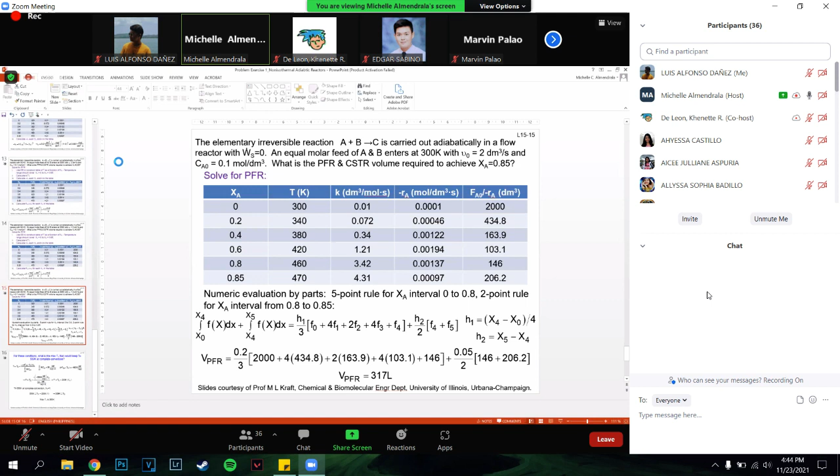Okay, let's start with this energy balance. I prefer the lecture of Dr. Kraft from Illinois because it has the detailed... anyway, so I'll just start with this. We will now be discussing thermochemistry for the non-isothermal reactor design. Everybody ready?

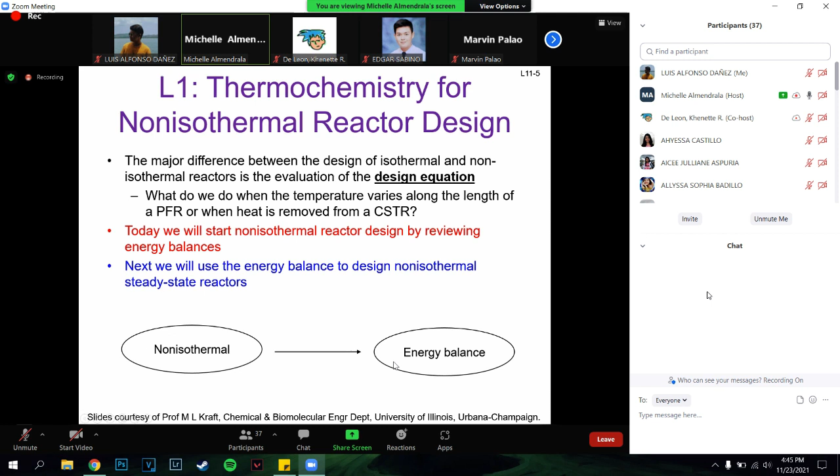The major difference between non-isothermal and isothermal is that there's another equation you'll need, taken from the energy balance, to correlate the conversion as a function of temperature. So why? Okay, we already answered that question.

For liquid phase reaction, take this example - this is a liquid phase reaction, exothermic, so heat is given off during the reaction. So there's a process wherein heat is being released. In your study of thermochemical equilibria, you have seen that when heat is released during exothermic reaction, if this heat is not removed, what happens to conversion? Conversion is low when Q is 0, for adiabatic process.

So for today, I will just discuss adiabatic operation first. The thing about adiabatic is that the conversion is low, when you compare this with non-adiabatic process, wherein heat will be removed from the reactor as it is produced, there will be heat transfer. There will be a cooling system around this plug flow, whether it's going counter current or co-current flow of cooling fluid. You'll find out that the conversion is much higher if we have this type of system.

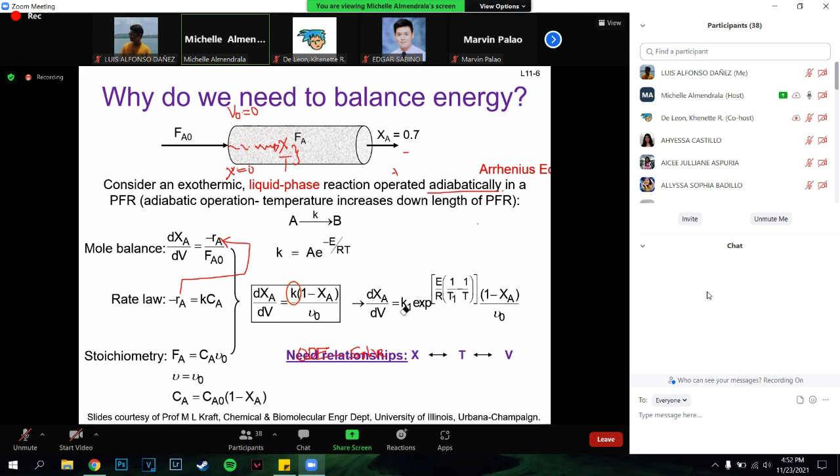All right, so that's explained already in that presentation. K will be expressed as a function of T using the Arrhenius equation. Usually the value of K1 is given at a given T1, at any given temperature during the reaction within the plug flow reactor, for example. So the temperature will vary as you go from X1 to X2, say.

So at this part of the volume of the reactor, temperature is T2. The reaction proceeds throughout the length of the reactor. You have T3, until the final volume of the reactor, where the conversion is X final, and the final temperature is T sub F. So this temperature is the changing temperature of your reactor, which is the variable, a function of X.

Variable as a function of X. Okay? It changes with X as you proceed with the reaction through the plug flow reactor.

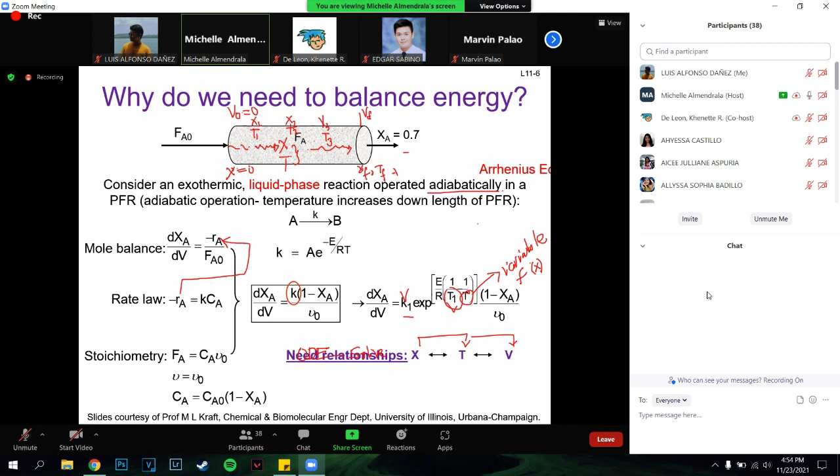Questions so far, class? So you have K1 given at T1—these are known values. You just have to see how the new value of K varies with temperature. That's how you see the relationship of X to temperature, and then you can now measure the volume, the design. Okay, let's proceed.

So, energy balance. The concentration of a reactant in a feed stream, the inlet, will be greatly influenced by temperature when the reactant is...

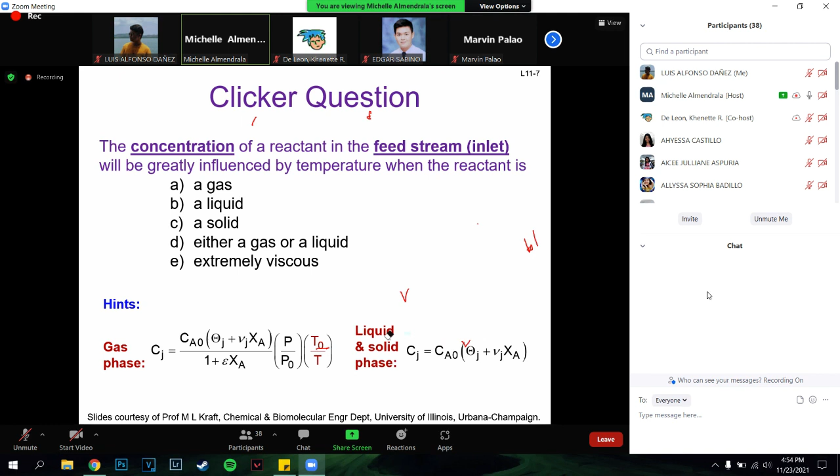So can anyone answer this—when the reactant is gas, liquid, solid, or extremely viscous feed? Ma'am, yes, gas. Very good, because gas is always based on the ideal gas law, always dependent on pressure, volume, and temperature.

For liquid and solid, the pressure variation and temperature variation—especially pressure—it's not greatly affected by changes in pressure. But of course, for most chemical reactions, we try to keep the pressure as low as possible, at standard pressure, 1 atmospheric pressure, 1 bar. Usually that's our pressure, unless it's a gaseous reaction.

Mostly, of course, the pressure inside the reactor will change. But for most solid and liquid reactions—especially liquid, since we rarely have solid reactions in a reactor—the pressure is kept at standard condition, 1 bar, 1 atmospheric pressure. But for gas, of course, it changes with pressure, unless the pressure is kept constant. So it depends on the process or design.

Therefore, for a gas phase, this is our concentration of species J at any given pressure and temperature. All right, so if pressure is constant, we can cancel that. If temperature is constant, T0 over T is one. But in our case, temperature is not constant, and we try to maintain constant pressure within the reactor, if that's possible.

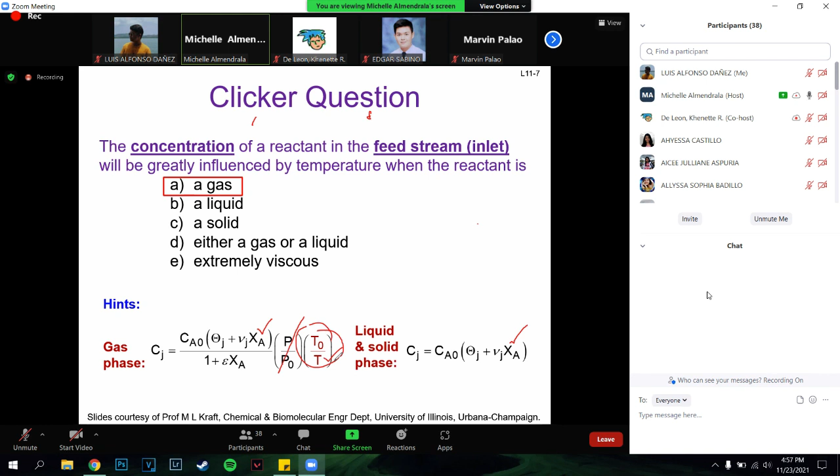So our objective is finding the concentration as a function of temperature, in terms of conversion as a function of temperature. In that case, we have to keep our pressure fixed in order to study how temperature varies with conversion. So we have to keep this fixed and vary only our temperature. So we have our C sub j as a function of conversion, and that conversion is a function of temperature as well. All right, next.

In thermodynamics, a closed system—your reactor is a closed system for a batch, for example. Our general equation for energy conservation is that whatever is the change in energy of the system is due to the reaction itself. We're talking of a closed system, where the flow of mass in and out is zero.

There's no flow of mass in and out for a closed system, but there's flow of energy. Whatever is the energy change within the system is due to the incoming heat and the work produced by the system. Incoming heat is positive. Q and work are inexact differentials, meaning they are not state functions, they are path functions. So you have to take the total change in heat and work, dependent on the path taken, whether constant pressure or constant volume, from an initial to a final state of the system.

Our sign convention is: heat flow to the system is always positive, and work produced by the system to the surrounding is negative. Work done by the system on the surrounding is always negative work. Work done on the system is positive work. That's our sign convention. So negative work is done by the system to the surrounding as heat is added to the system. This is a general energy balance for a closed system.

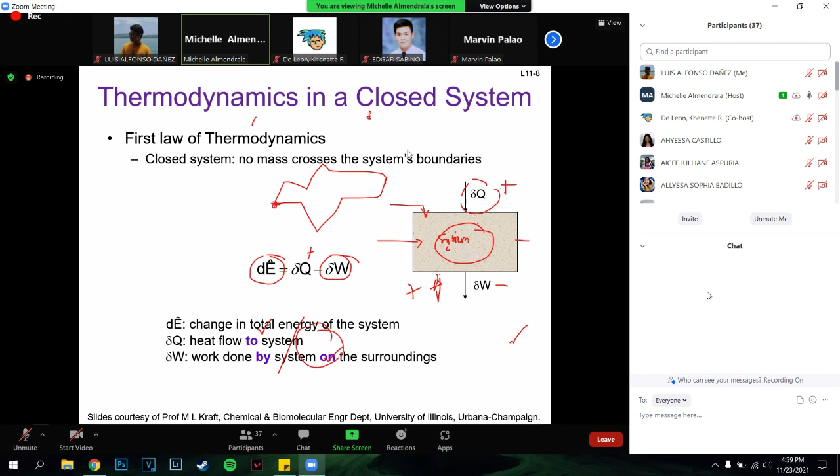Now our reactor is an open system. Unless it's a batch, it's closed. For CSTR, PFR, packed bed, membrane, bioreactor—where you see flow of mass in and out—it's an open system.

So heat can flow in and out. Each species, as an individual species, carries with it a certain energy, and that energy is taken in by the incoming species and the energy out due to the outgoing species. So there's energy input and energy output because of the incoming and outgoing species. Also, there's heat flow due to heat added to or removed from the system, or maybe work done by the system or work done on the system. So that's the energy flow.

There could be what we call energy production within the system because of the energy of the reaction—the enthalpy of the reaction at a given temperature T. As the reaction proceeds, heat will be produced during the reaction. That's why if you keep the heat inside, the temperature keeps rising or increasing, becomes higher and higher as you proceed, because heat is accumulating inside the reactor.

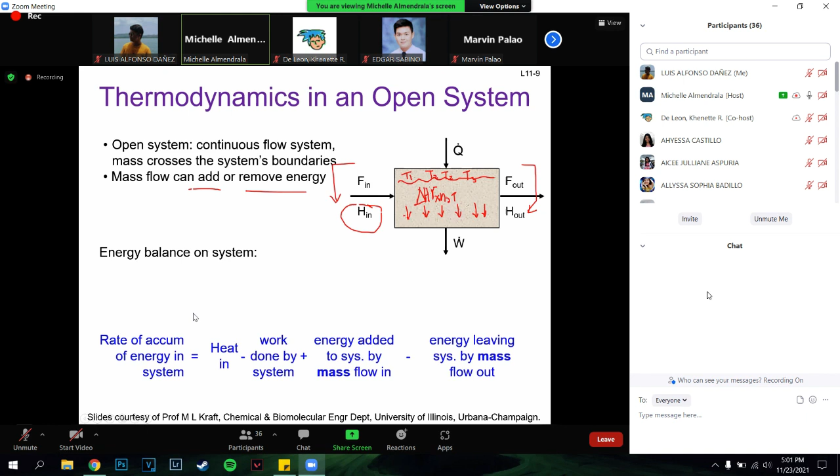Are you following this, class? Anyone familiar with this? Have you done energy balance in a reactor with an open system? Not yet? No. Well, not yet. Okay, follow this discussion, class.

This is understanding how temperature inside the reactor is changing with respect to changing conversion. In this case, we will assume a steady state operation, so the rate of accumulation of energy. For unsteady state operation, of course, energy inside will be accumulated, so there will be increasing energy inside—rate of accumulation of energy in the system for unsteady state, with time, heat will be increasing inside.

So what about this? Heat input—there will be all the heat coming in. Energy input is positive. Work done by the system is always negative. Let's do the energy balance: heat in, heat out, energy leaving, energy added to the system. Say the system requires heat for the reaction to proceed, so it's an endothermic process. Now, energy that is leaving the system will be carried out by the mass itself, and that's leaving, negative. So this is the total energy balance.

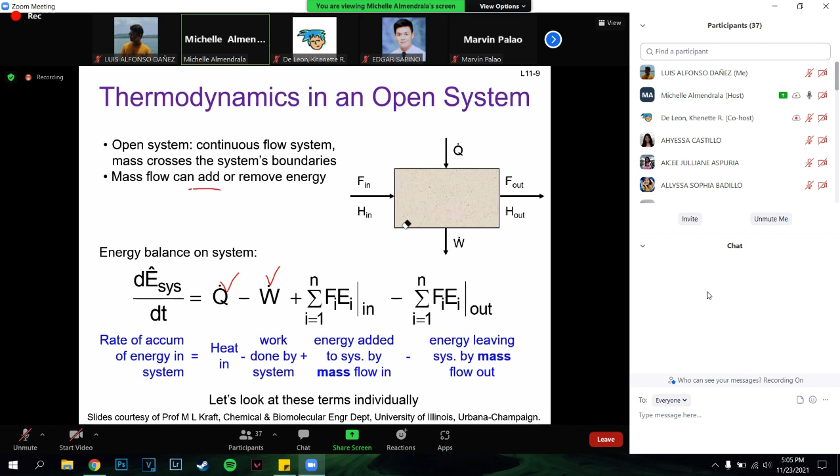Later you will see this enthalpy reaction as we define the flow of mass in and out, because what is going out, the energy that's coming out will be a fraction of that is part of the energy of the reaction, heat of the reaction. So let's take the individual components of this energy.

Since you already know enthalpy as a state function, we will be working on that, and you know internal energy to define the energy of the system. What is that energy of the system? Internal energy plus the flow energy, the flow work.

This energy represents internal energy, the microscopic energy of the system. If you consider yourself as the system, your body has internal energy due to your body cells. These are the microscopic forms of energy due to the molecules that comprise the system, always in translational motion, vibrational motion, rotation, friction, and so on. Whatever is happening in your system is a measure of your internal energy, whether it's kinetic energy of the molecules or potential energy as they move from higher or lower energy levels.

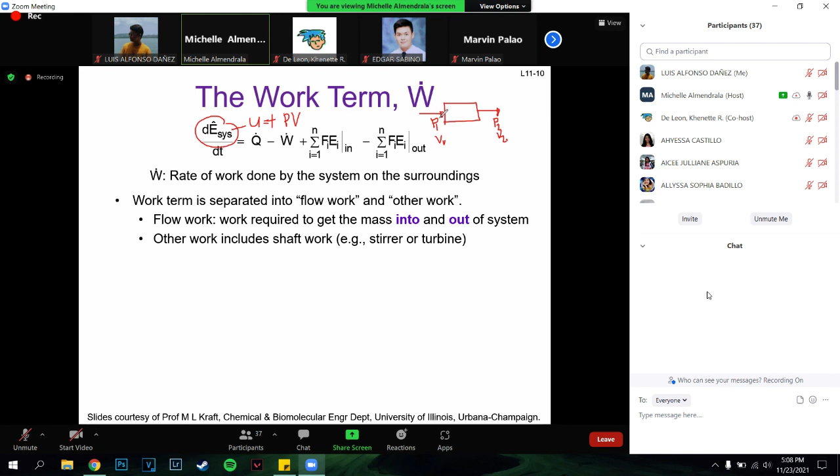So that is the flow of fluids, right? For the fluid to flow, you have to cause a delta P, a certain delta P. There will be a driving force for fluid to flow, and that push requires some sort of energy, and that pull also requires some form of energy. Of course, delta P is for pumping. P1 is always greater than P2 for a fluid to flow from point 1 to point 2. So this requires some form of energy that has been added to the system as it goes in and out of the reactor through the piping system.

So this is what we call the flow energy. And so much for that, class, since I think you have done this already before, the flow energy and that of the microscopic energy. Follow, class? All right, yes.

So we need to dissect all of that, the definition of flow work and other work. This work here as well, the flow work includes that. So the work that is needed by the system includes the pressure volume work and the mechanical work added to the system. So that consists of that.

So in that case, we have the work term into and out. Other works include the shaft work, which is this, if it requires mixing, but most of the time it's going to be negligible in most of our calculations here. So the work requires pressure volume work. Internal energy represents the energy of the system, mostly internal energy, and the work represents the shaft work and the flow work, which is the pressure volume.

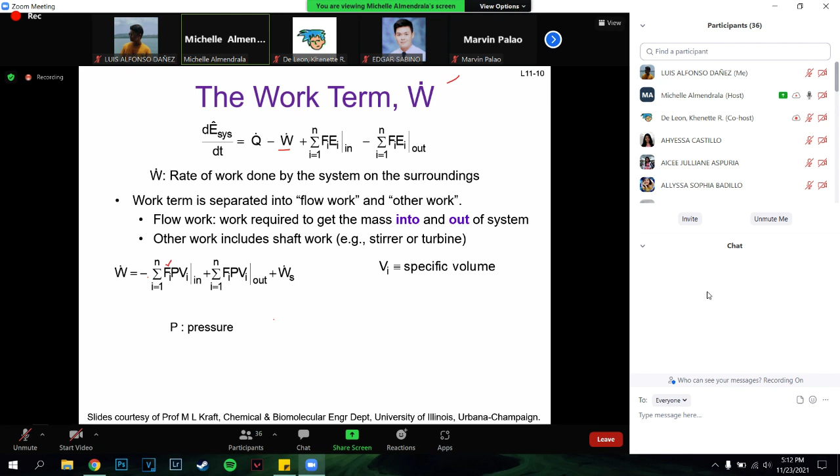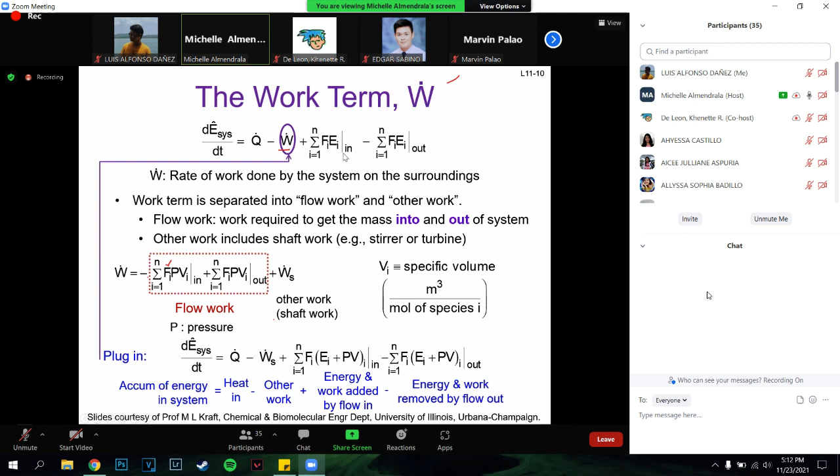So we can combine this energy here, flow work in the energy in, and flow out in the energy out. Combining that, since we're talking of the same species coming in and out, wherein we push those coming in and push out the ones coming out, with the pressure P out.

So combining that in this energy term, analyzing the energy term again, we're talking of the system internal energy, the kinetic energy of the system that I am discussing.

And if the system velocity is considered and the displacement as it flows from the horizontal, say a plug flow reactor, there is usually for a steady state process velocity 1, velocity 2 at point 1 and 2, inlet and outlet, considered negligible. And so the displacement is also negligible since delta Z is 0 for a horizontal flow. So that will be the totality of the energy of your system coming in and out.

And other energy, the magnetic, electric, is usually negligible as well. So that internal energy, the energy of the incoming and outgoing species, will just have to be simplified as internal energy.

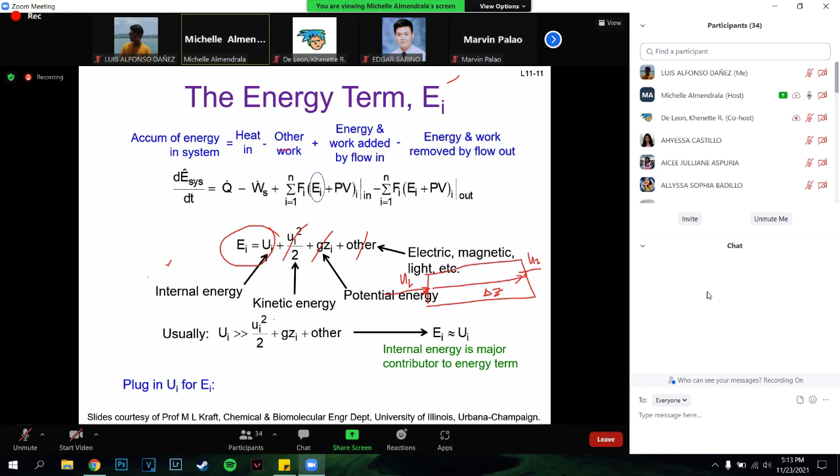Therefore, the internal energy plus that of the pressure volume work, we know how to define that, right? So we define that as your enthalpy. Okay, so that's how we do your energy balance, a detailed energy balance, so you can understand better how you do your energy balance for your non-isothermal reactor design.

So again, simplifying further, we can proceed much faster, class, right? Any questions so far?

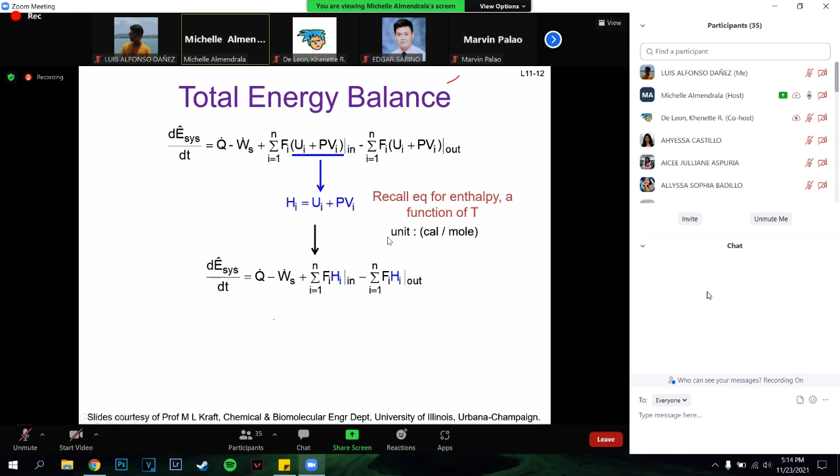So instead, we are now defining enthalpy instead of U plus PV, combining those two. So enthalpy now, later we will define the enthalpy of the reaction. Now it's leading to defining enthalpy.

Now enthalpy of the incoming species at temperature T sub O. Remember class that your reactant will be coming into the reactor initially at a temperature Ti sub O. Now Ti refers to the individual species entering the reactor. So maybe species 1 will be entering separately from species 2, okay, B. So that's why maybe the temperature of reactant A will be different from the temperature of reactant B.

So that will be Tb sub O, and this is Ta sub O. Maybe they will be having different incoming temperatures, but most of the time, say if the reaction involves a solution of A and B, they will have an initial temperature of the mixture or solution. So it will just be T sub O. So you don't really have to specify individual species temperature coming into the reactor.

Is this clear, class? All right, so you will see that later. So it could be part of your simulation reactor wherein you have varying input temperature of the reactants or solution. So T sub O is the incoming temperature of a feed solution, or T sub O is the incoming temperature of the individual species of the reaction.

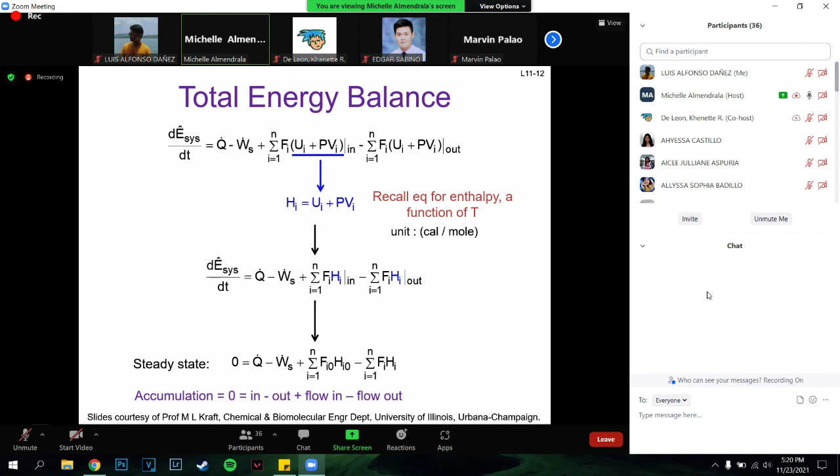So you see now the first law application in this reactor, an open system reactor. This is the statement of the first law of thermodynamics in an open system. Follow, everybody? So this is how you see your energy balance, or application of the first law of thermo, in your reactor design. Now let's proceed further.

Now this is just an indication of what is this flow of species leaving the reactor. This represents the product, right? So this represents the species leaving the reactor, and the molar flow rate of species i leaving the reactor represents your product and the unreacted reactant. So that represents, say for a reactant species, how much.

It is usually FA0, the initial flow rate of A. Since there is flow rate, we're talking of the flow of moles of A per unit time, say per second, and how much will be reacting. So minus the coefficient of A, the stoichiometric coefficient represented by A, multiplied by how much is used, how much is converted.

So that will be this amount based on the initial amount, and this is the conversion of A. Based on the balance equation, this is the amount of A needed for the reaction itself, the amount that reacted — initial times the conversion. But of course, you need to specify also that there's a limiting reactant, so based on the exact amount of A that will be reacting, you have to multiply by A.

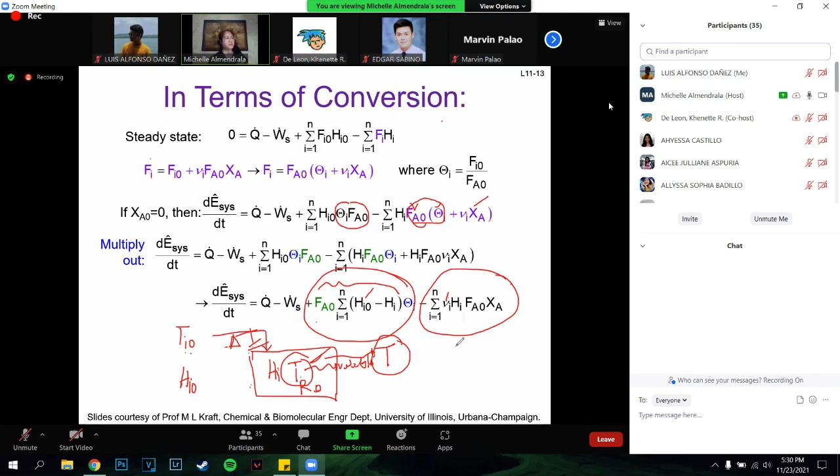Yes po, okay, very good. So that's how we see this, how we picture this group. Okay, this is how we picture this group. And then the next group. Now this is nu sub I. So remember when we say V sub I, it's positive V sub I for product and negative V sub I for the reactant. Follow?

Negative V sub I for the reactant. So the summation of V sub I, product minus reactant, will be the enthalpy of your reaction multiplied by the conversion. Whatever is the conversion will be the amount of heat of the reaction produced per mole of the reaction. So that represents the heat of the reaction.

Okay, let's proceed now to our final equation. We have already defined the last two terms. One is related to the enthalpy of the reaction calculation, and the other is the heat required for the reactant temperature to change from T sub zero to T sub I, the temperature inside the reactor.

So let's see, we already know how to define enthalpy of the reaction from your Phys Chem. Enthalpy of the reaction, since this is a state function, can easily be defined in terms of standard enthalpy plus the delta Cp of the reaction changing from T to T reference, plus enthalpy standard. I will not discuss that in detail anymore. So this enthalpy of the reaction is already defined.

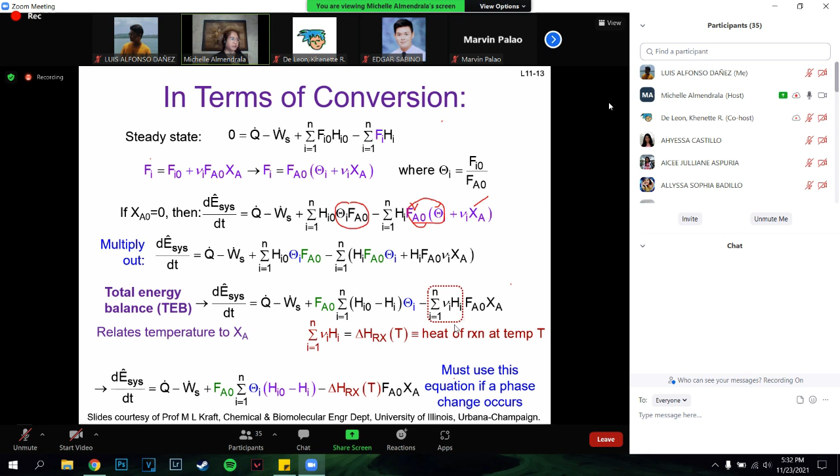We know how to define that as a state function, because there's no way we can directly measure enthalpy of the reaction. So we have to change the path of the reaction, bring down the temperature of the reactants from T of the reaction to T reference, where you can measure the standard enthalpy of reaction at the reference temperature, which is 25 degrees Celsius or 298 Kelvin. So you can have the reaction at that temperature, 298, and then once you produce the product, you have to bring it back up to the temperature of your final product. That is how we define enthalpy of the reaction.

This standard enthalpy is always a function of the standard reference temperature plus the enthalpy of formation of the individual species. This is a more detailed discussion of enthalpy of the individual species, based on some reference temperature, but I will not cover that anymore.

So enthalpy at the reference temperature. This is just a simple definition, so in short I will just give you the final enthalpy of the reaction, which you already know how to get, if the individual species is defined in terms of enthalpy, and enthalpy is defined in terms of heat capacity, wherein the heat capacity is a function again of temperature.

So given that, enthalpy of the reaction will be based on the standard enthalpy of reaction, based on the standard enthalpy of formation of product minus reactant, plus the heat capacity at constant pressure of the reactants and products from T to T reference. So you know how to define this already.

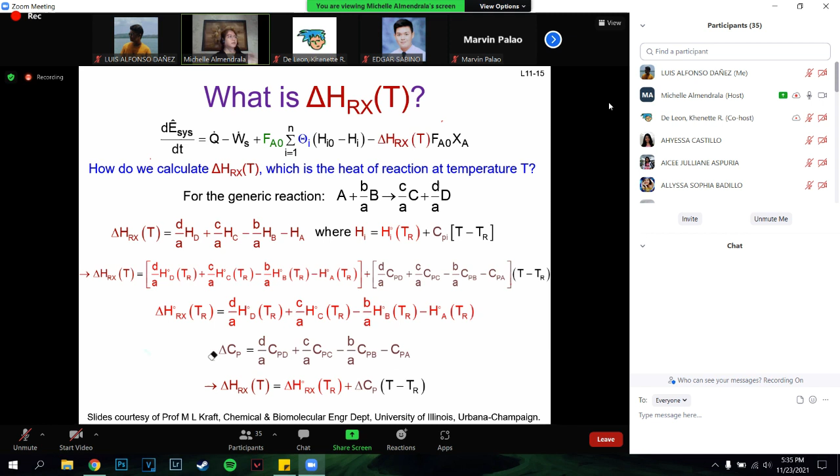Follow, class? Let's not go into the very detailed discussion of delta H anymore, but you can read that on your own. So everything is based on a reference temperature, and then everything cancels out.

Alright, so we already know how to estimate the enthalpy of the reaction given this. You need to know the Cp of products minus Cp of reactant. So this is one example.

Alright, so let's proceed, it's like we're still on slide one. It's 4:30 to 6, I only have 30 minutes. Okay, let me proceed now with this.

This is just estimating enthalpy of reaction. We already know how to do this in Thermo 1 and in kinetics, right? So enthalpy of reaction is calculated given the heat capacity of the products and reactants. So this is one example, and of course everything is based per mole of the reaction.

So in this case, per 1 mole of nitrogen, this enthalpy of the reaction at any given T is calculated based per 1 mole of nitrogen that reacted, based on the balance equation here. Or you can define this per 3 moles of hydrogen or per 2 moles of ammonia. That is per mole of reaction. But of course, you want to know how much is the exact amount of nitrogen that reacted, it's not 1 mole, right?

But if it's, say, only 3 moles that reacted, then to get the total heat of the reaction, you have to multiply by 3.

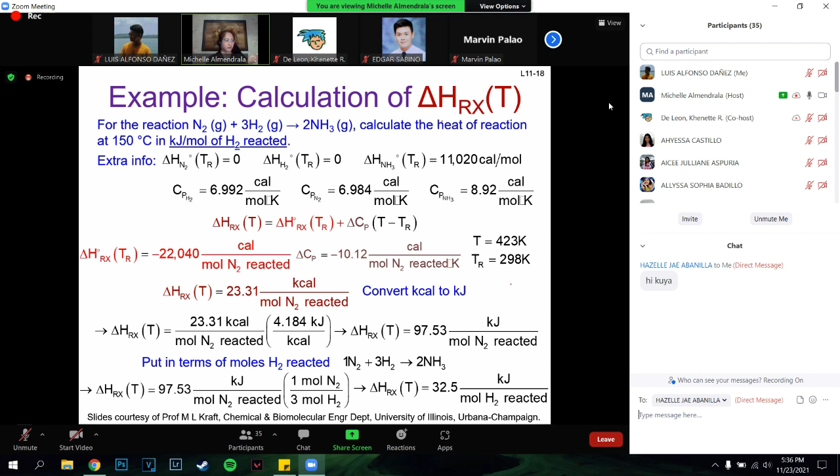Or if only 0.5 moles of nitrogen reacted, you just have to multiply by 0.5 moles to get the exact amount of nitrogen that reacted. In this case, this is per mole of hydrogen. There's 1 mole of nitrogen available, and 3 moles of hydrogen, so in terms of hydrogen, you get only 32.5 per mole hydrogen.

So anyway, enthalpy again is what we call - in this case, this is per mole. So ano yun, class? Intensive property. If it's extensive, you have to multiply by the quantity, how much reacted.

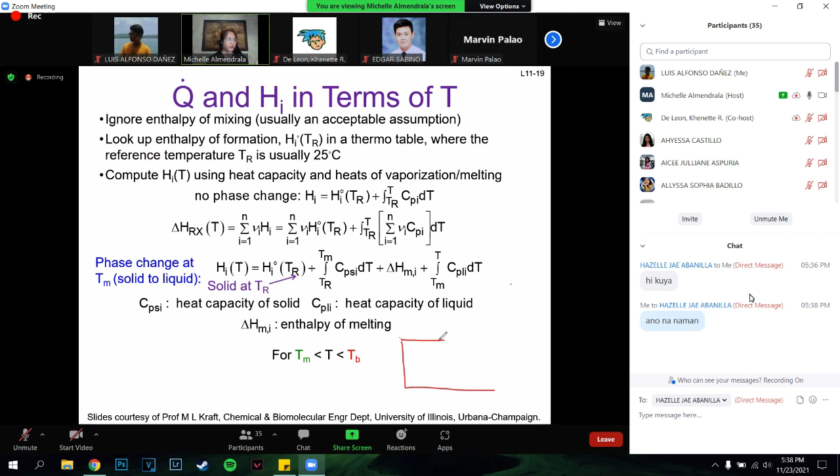Now, in this case, phase change at Tm, solid to liquid. So enthalpy of the reaction, if there is enthalpy change or phase change, the enthalpy has to be recalculated by adding a certain heat of phase transformation. So if the reactant is solid, and it enters the reactor that is very hot, so that's solid now. This is what happens when we calculate enthalpy. If the reaction has phase change, the enthalpy of formation of the reaction changes.

What is taking place is that the enthalpy of the reactant that is solid, once you enter the reactor, that reactant becomes, say, liquid or maybe gas, or in this case, liquid. There are reactants like used oil for biodiesel - it enters the reactor as liquid, and as soon as it enters, it becomes vapor. So there's heat involved in the transition from solid to liquid. Heat must be added, heat must be absorbed by the reactant as it transforms its phase from solid to liquid, or maybe from liquid to gas.

So this is that energy, delta HM. The heat capacity of the solid is known, and then delta T. The heat capacity of the liquid is known as well. So you have enthalpy of melting at a constant temperature, at the temperature of the reactor. So there's a lot of energy involved - that heat that is involved in changing the temperature of the reactant from Ti to T.

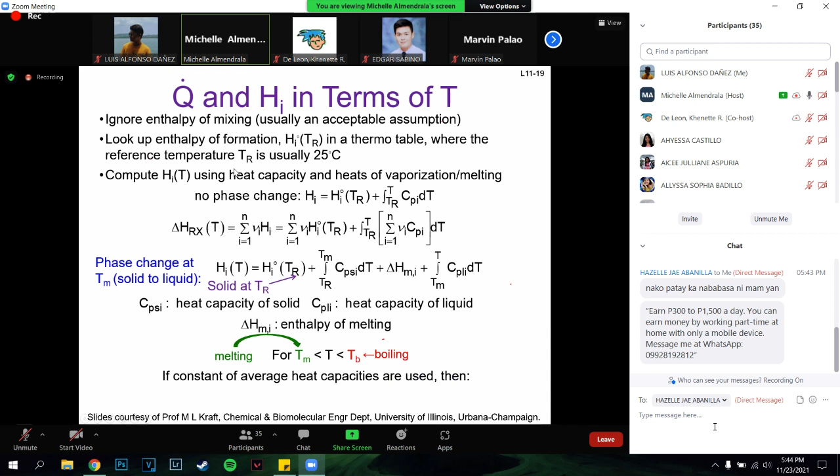So that way, our phase change now. Instead of having it in short class, I'll not make a detailed discussion of that. So if it involves phase change, okay, we have to refer to enthalpy, enthalpy definition.

So if there is a phase change, of course, the enthalpy is expressed as enthalpy initial and final, and enthalpy of the reaction. Of course, this enthalpy is defined also in terms of heat capacity. So overall, this is our energy balance.

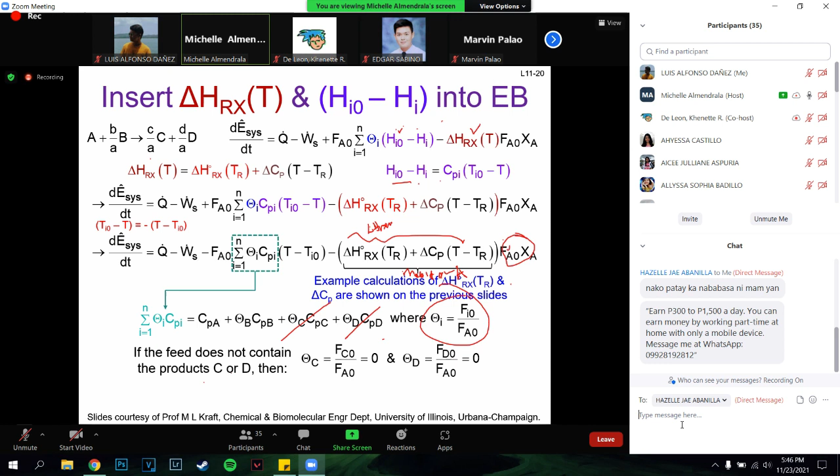Again, that enthalpy, that theta i, usually if there's no product, it has to involve only... Okay, so again, this is our final equation. If the product, or if the reactant will not undergo any phase change, this is good for your energy balance. If there is phase change for the reactant, you have to express everything in terms of enthalpy.

So that's the difference between the two types of reaction, with phase change and without phase change, usually for most reactants entering the reactor. So you see now, the energy accumulation again, if it's 0, if it's steady state, this term is 0. Q, WS, most of the time this is 0, so later you will see this just cancels out. But this is our general equation when there's no enthalpy, when there's no phase change for the reactant.

So if the reactor is at steady state, which term in this equation would be 0? Again, I already mentioned this, class.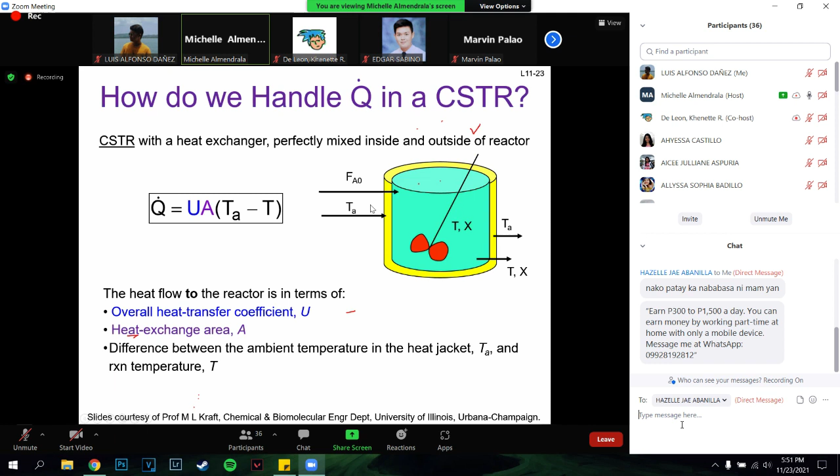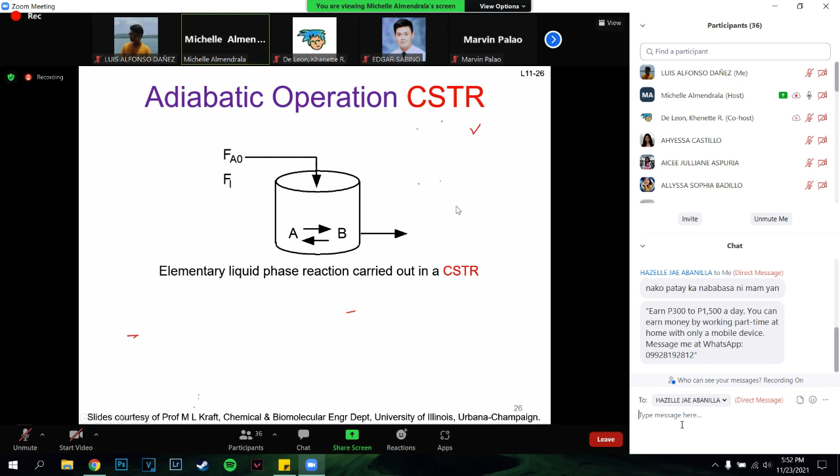That's the big picture of the first law of thermodynamics in the flow process, flow reactors. I won't be able to reach that part. How do we handle Q in a CSTR? Why is it non-adiabatic now? The energy equation will be for later, let's focus on adiabatic first. Hold on class, it's already 17:51 and I only have 9 minutes for this, so I'll just show you again the final equation for a CSTR adiabatic process.

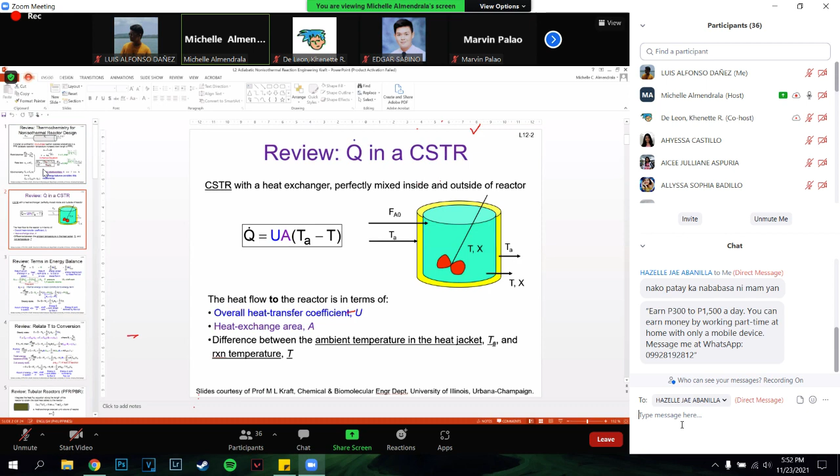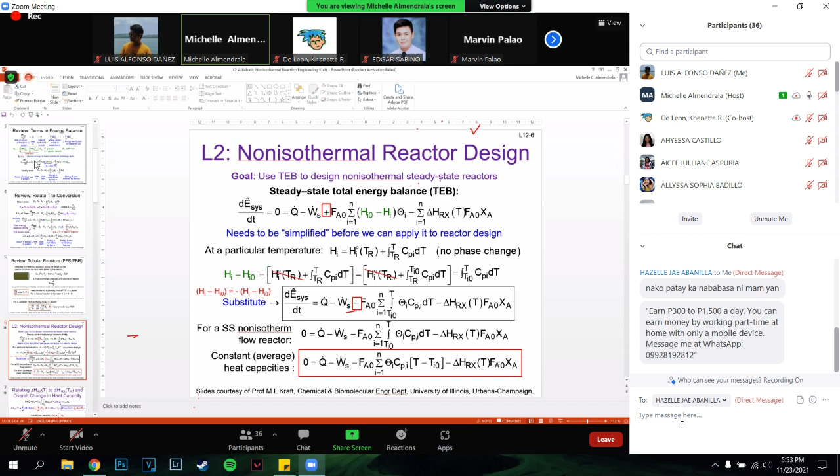From the energy equation, this is that energy equation. But before that, I guess the energy balance wasn't shown here. You can actually read this lecture, the second lecture, and also read the lecture from our book on the summary of the T-X relationship. So from here, class, you can have a review of our enthalpy.

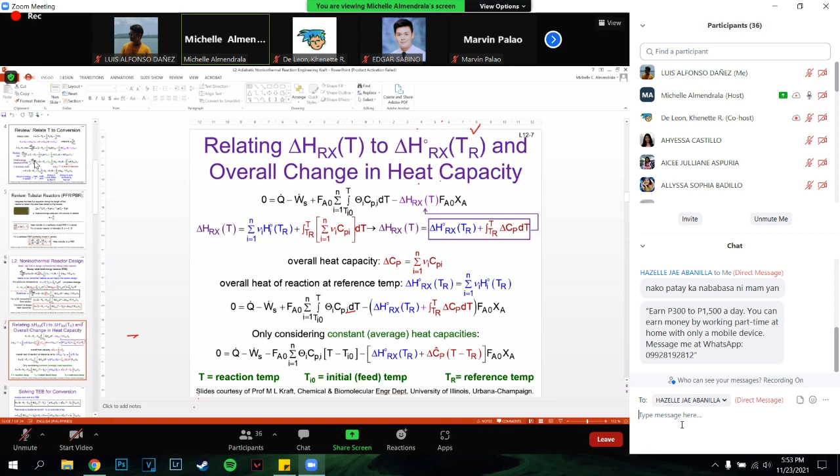Definition, enthalpy of the reaction, initial temperature of the feed. So solving the energy balance for conversion, this is actually the definition of XA as a function of T. For an adiabatic process, this Q is 0, and most of the time WS is 0. That's why you should see the derivation of the T-X relationship in Fogler for adiabatic conditions.

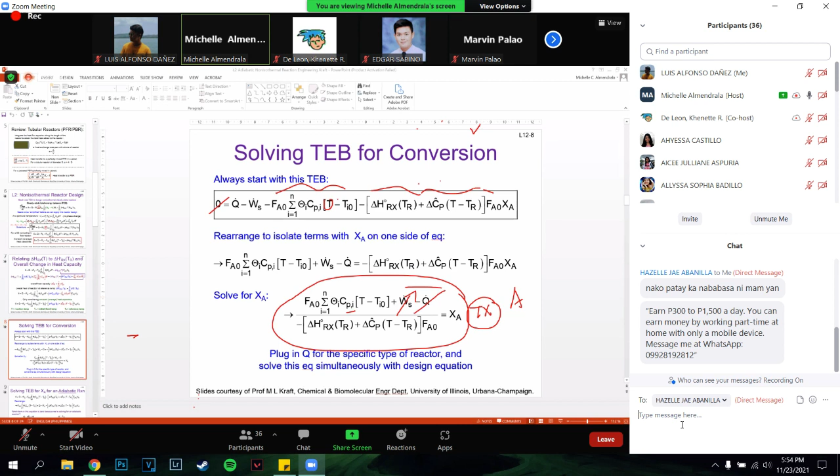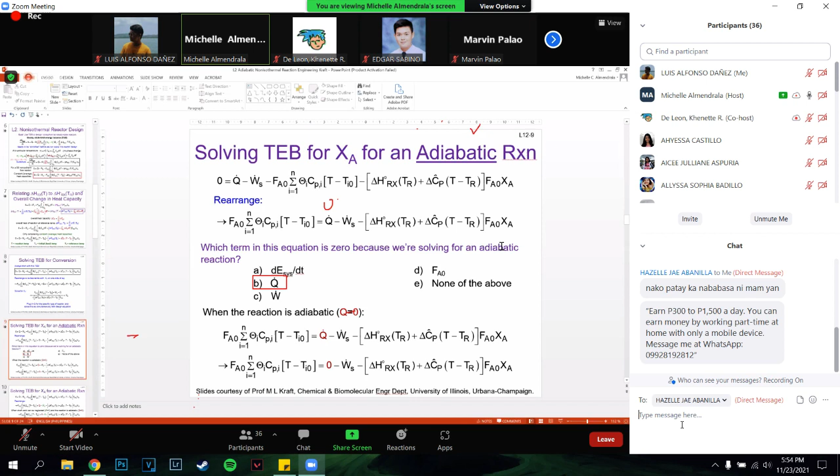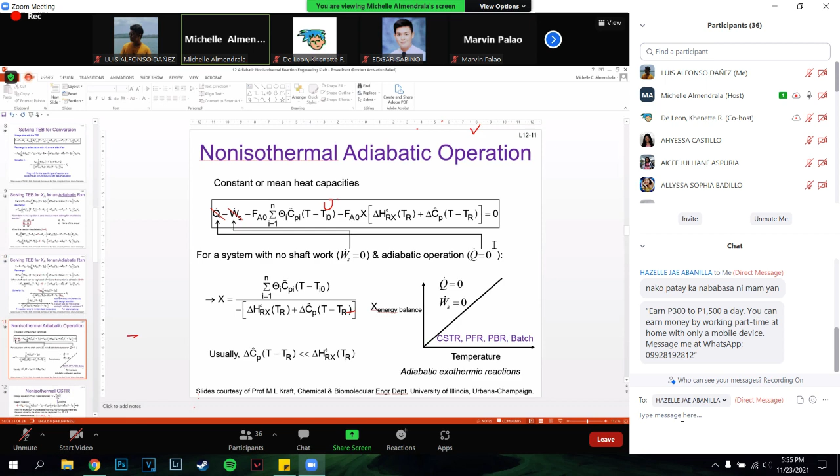So this is actually that relationship, from the overall energy balance that we defined earlier, which is this. So this is 0, so we just have to obtain T as a function of X. I will not discuss that process in more detail. So when Q is 0, this is where we assume adiabatic operation. Read this lecture, class, and next meeting we will continue, and hopefully I can finish the second problem for the non-adiabatic case. Simplifying, this will be the total energy balance for XA for an adiabatic reaction.

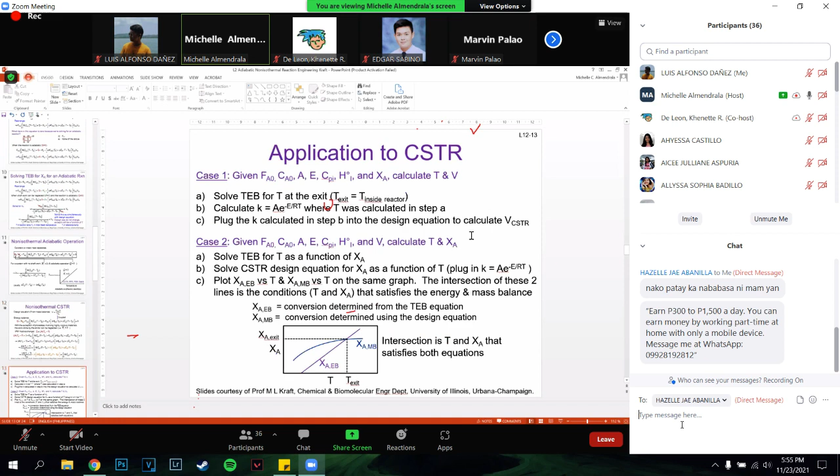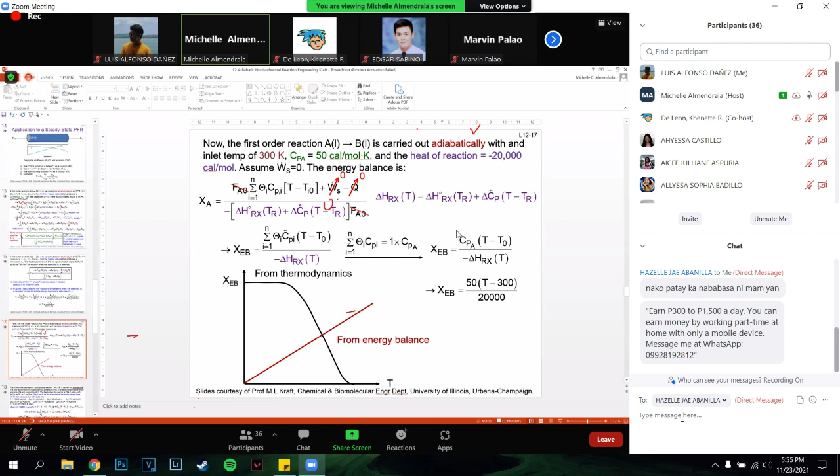Let's work on this next meeting. So non-isothermal CSTR and application, given this equation for case 1, application to steady-state PFR, adiabatic as well. We will cover this next meeting for non-adiabatic CSTR and PFR. For today, you have already learned how we derive all these equations, and we will apply again your integration techniques. In this case, this is just a simple 2-point rule.

You already have the 4-point rule. What is the 4-point rule, class? How do you derive it? In integration, there's the 4-point rule, actually the 5-point rule. We have the 2-point rule and the 5-point rule. The 5-point rule is derived from Simpson's 1/3 rule, where n is 2, wherein each segment is divided into multiple segments, 2 multiplied into 4 segments. The area of Simpson's 1/3 rule has each segment divided into 2, so overall you have the 5-point rule in that segment. That's how you define the 5-point rule, so your integration by Simpson's 1/3 will be more accurate. That is the Simpson's 5-point rule. Because you have the 2-point rule, we also have the 5-point rule.

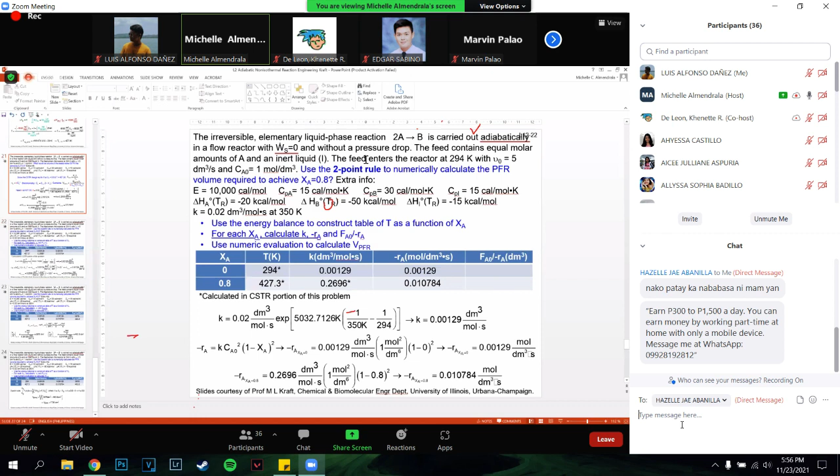So study this example and the other example found in our lecture. I already uploaded one problem exercise and posted one problem set. We will finish this discussion next meeting then. Alright, any questions so far, class?

Ma'am, would the assigned homework for this lesson be moved to next week? Yes, it will be moved to next week because our discussion on energy balance was quite long.

Anyway, with this discussion, class, you are now confident that you can do energy balance for a CSTR, PFR, and any type of reactor. Are you confident now, class? Yes? A bit. I think you're now confident to do energy balance and material balance for any reactor, right? Yes ma'am. Very good. So just don't forget how we do that. This is simply first law of thermodynamics, that's how you apply first law of thermodynamics. But of course, this is a flow reactor design, so it's very important if you're going to work particularly...